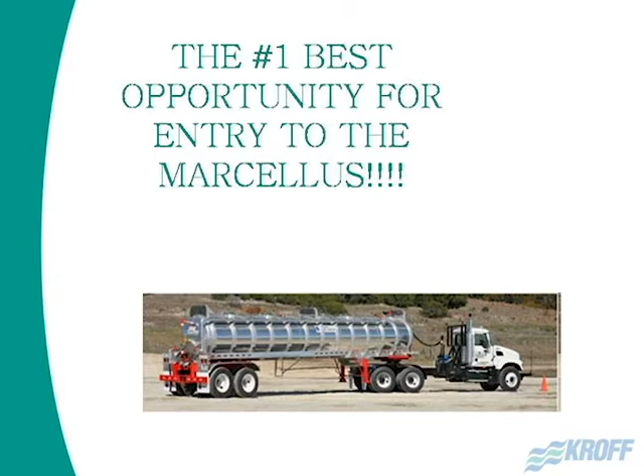I believe the #1 best opportunity for entry into the Marcellus, unless you want to be a lawyer and do that stuff, or you want to get out there and be a welder, or transport water or whatever, the #1 opportunity is water. Water is everything you read about in the paper. They need the water. They're not going to let them keep going out and getting fresh water. They're not going to keep letting them dump it back into the environment. You're going to have to reuse water, or you're going to have to move out of the Marcellus Shale.

So reuse rather than release. We're going to reuse that water rather than release it back into the environment, and it's been done. We've done it on thousands of stages, hundreds of wells, and the beauty of it is it's clean salt water, and there's a lot of halides down in there in formation. Clean salt water actually fracks the well better than fresh water. More weight, higher osmotic pressure, higher specific gravity, more dissolved constituents, cracks the rock better. So clean salt water is their target. They won't tell you that because that industry isn't sharing anything.

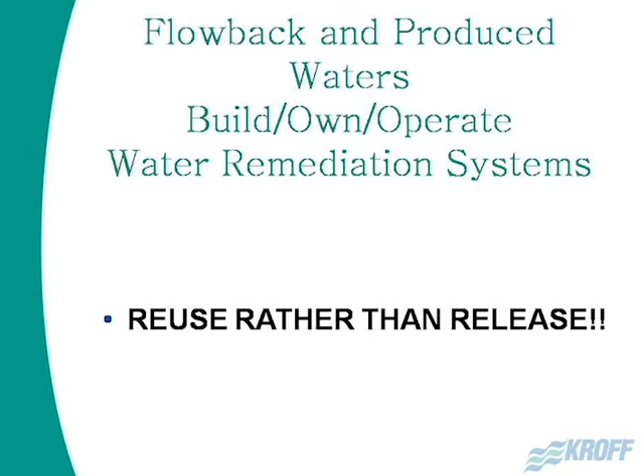These are the reasons for reuse, and I'll go through this fast. It's occurring in an environmentally sensitive region. We need to reduce the amount of fresh water withdrawn from the environment. We need to be compliant with the DEP regulations. This is done, that's an old slide. We have now eliminated publicly owned treatment works. They can't take water anymore. And then we need to demonstrate to the public that low impact development is possible. Steel industry, coal industry, mining industry, all those people went in, made their billions and millions, created jobs. This industry can. It's just they're under the limelight of the internet.

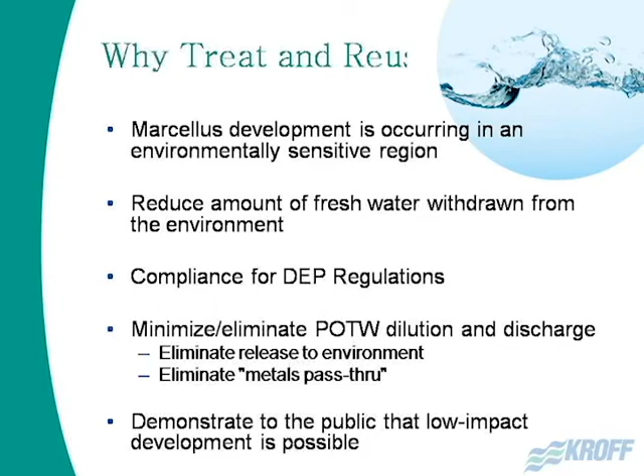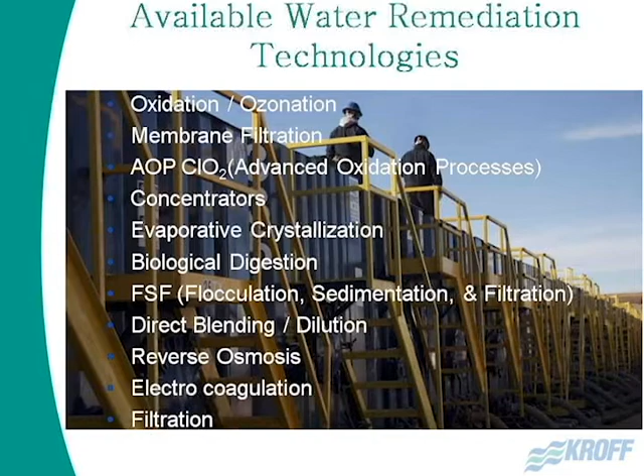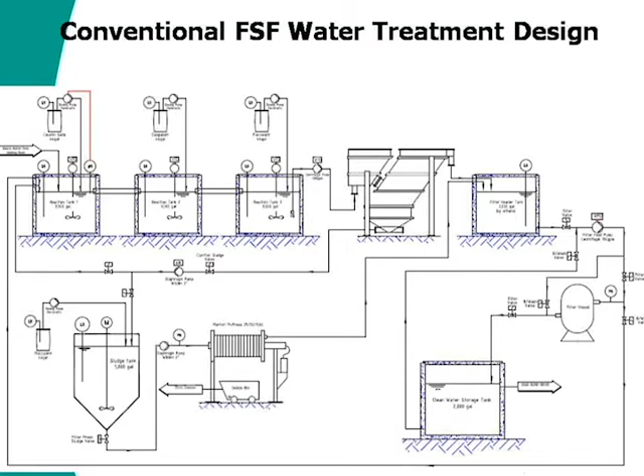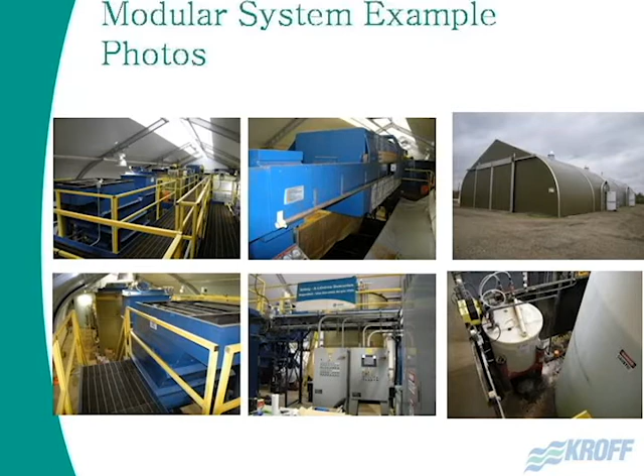These are the types of technologies that are out there. This is the one I'm using, which is basically flocculation, sedimentation, filtration. Make the particle bigger, let it settle out, filter it, give them back clean and fresh water for reuse. You can look at some of these other fancier things, but none of those are really necessary. But you need to understand that those technologies exist. This is my design: a couple mixed tanks, a lamellar style clarifier, plate and frame press, sludge thickener. Sludge goes to a landfill as a non-hazardous material. Water goes back to the operator for 100% reuse.

This is an example of a modular system. Now you can have stationary systems that bring water into their facility, they truck it off, they treat it, and they do whatever they need to do. I like this design because these guys don't want to have trucks on the road. They don't want to pay for the diesel. They don't want to pay for the transportation. So they're going to put something up that is somewhat temporary but somewhat permanent. They're going to put all their treatment equipment in it, their switch gear and their chemical storage tanks and all that stuff. And they're going to treat water for 3 or 4 months, get off that pad and go to the next location.

Here's an example of a mobile system. This guy physically brings it in, sets it up on the well pad, and treats the water here. Here's his clarifier. Here's his plate and frame press. This was a heated trailer because chemicals do freeze in the wintertime. Here's his chemical feed. So whether it's stationary, modular, or mobile, the best opportunity as I see it, if you guys want to jump into this market and make money, is get into water treatment because it is the key enabler to our Marcellus Shale development. Water, water, water. You don't need pads cleared. You don't need all that other infrastructure unless these guys have access to water to hydrofrack.

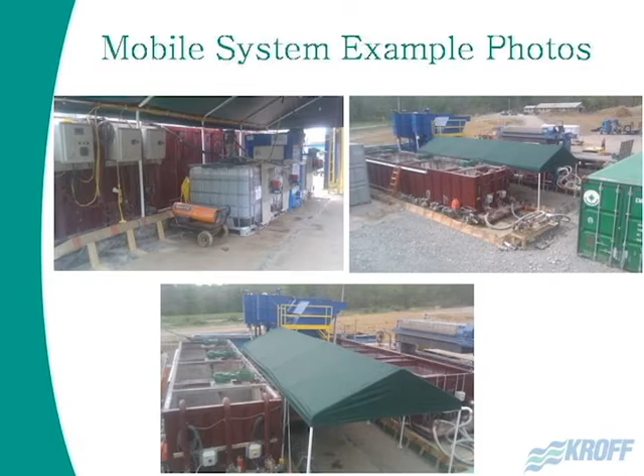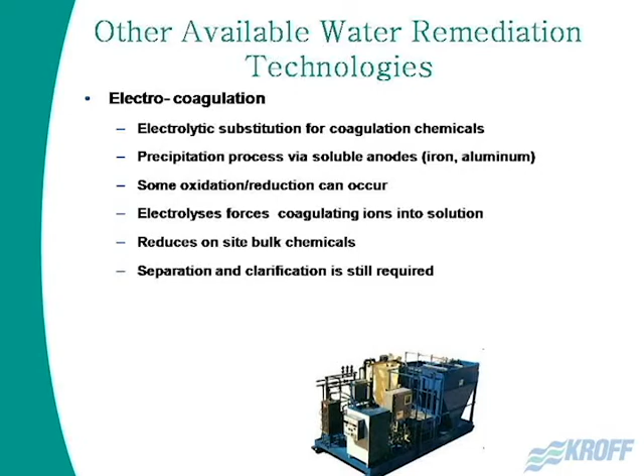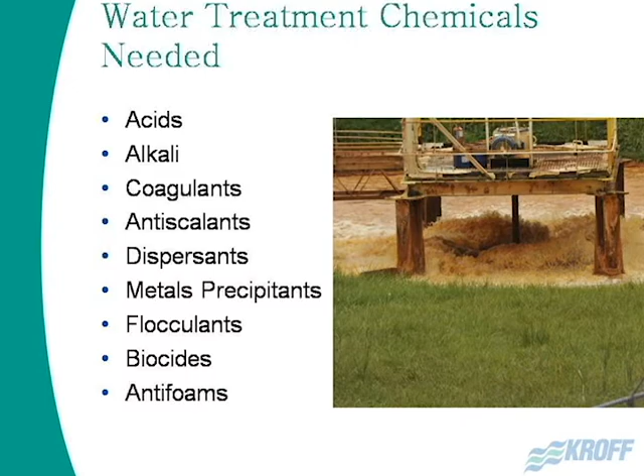These are some of the other technologies that I won't get into, but membrane technology and reasons why it's good and bad. Electrocoagulation's the new market darling. I won't use the joke that I use because there's women in the room, but it gets you halfway there, but it doesn't do the job. Simple filtration's another way to do it. These are the types of chemicals that are used. I gave this presentation to Pittsburgh Chemical Day last week, so a lot of chemical people in the room wanted to know what chemicals they can sell that industry, and those are typical acids, alkalis, coagulants, flocculants, biocides, antifoams.

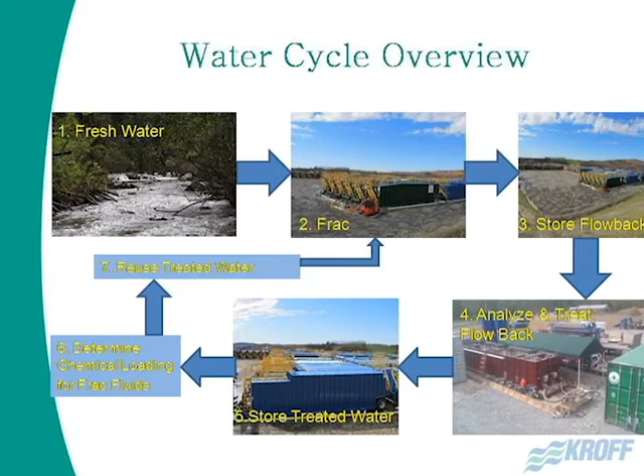This is our process. We simply take water from the environment. These are the frac tanks that they store the water in. This could just as easily be a pit that's lined. They'll frac the well. They'll store the flow back again in a pit or a series of tanks. In this particular instance, it'll go to a mobile, a modular, or a stationary treatment plant. It's sent back to them, stored as treated water, and then we take it back and we repeat the process. Zero discharge.

When you say get into the treatment of water, what are you referring to? Become an investor? I would, if I had money. I lost all mine. I was in the tech market. I was loaded in Enron. And WorldCom, I had a good position in WorldCom. I have no money left.

But if I had money and I wanted to do something, I would put a water treatment plant together, like I just showed you earlier. Cost for the water treatment plant? The modular system's 1.5 million. The mobile system's about 700,000. That's to get in, and then your operators, your sludge disposal and all that's going to run you about $2 a barrel. You charge them 3 to 4, and you make your 25 to 50 margin. That's not a lot of money at all. No, it really isn't. Well, you haven't told us about this.